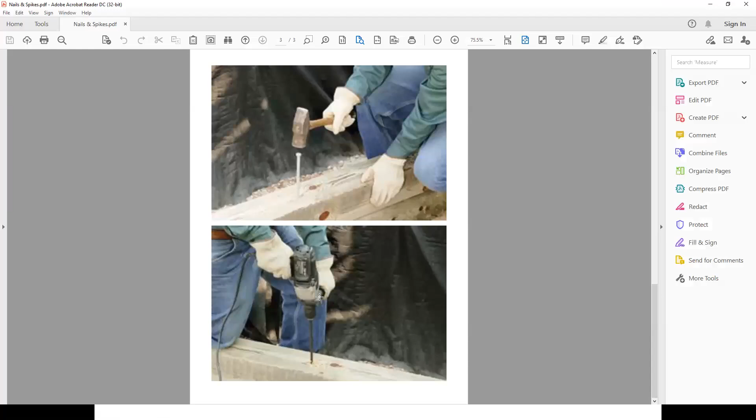So guys, these are of course nails. These are what we call common nails. There's a head and there's a point. And nails come in different lengths, starting at 1.5 inches, 2 inches, 2.5 inches. And they also have these, I never learned this, by the way, guys. I never specify, for example, a 3-inch nail with size D.

So I always specify the length of the nail. So if I want the guy to put 3.5-inch nails, I put a 3.5-inch common nail. And I want to specify common nail because today with the pneumatic hammers, they're also 3.5 inches, but the diameter is slightly smaller, and therefore it won't have the same resistance. And when they do that, what I tell them to do is increase the number of nails in proportion to the reduction in diameter. So keep that in mind.

So these are, like I said, nails that are fabricated from a piece of wire. So keep in mind, like I said, you can go up to 6 inches. Like when you're framing today, a lot of people are using screws as opposed to using nails, but nails are still being used. And of course, a lot of them are being used with pneumatic hammers.

So usually when you're framing, like in the old days, when you would be framing a house or a building, the most common nail you would use is 3.5 inch in length to fasten the lumber together, and then to fasten the sheathing, in other words your plywood, whether it's the flooring, the wall sheathing, or the sheathing on the roof, the most common nail they would use there was 2.5 inch. So the carpenter would most likely have 2.5 inch and 3.5 inch. That was the most common nail that they had.

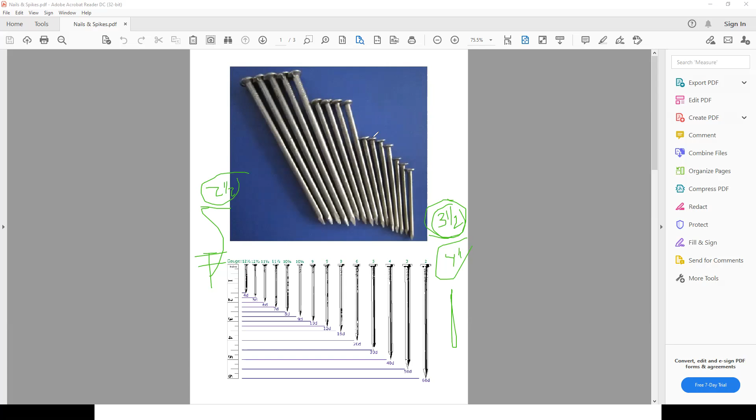And as a matter of fact, I know one carpenter, he likes to screw everything. He's got this cordless screw gun and he screws everything. And he's probably just as fast as the guy that's nailing with a pneumatic hammer, understand? And that's how he fastens things. I like his way of doing it because it's a much better fastener.

So just to let you know, these are the common nails, and that's what I want you to understand. Common nails. When you're referring to common nails, it's a regular head and so on. Now these are spiral nails. In other words, they basically are very similar to a common nail, but they are twisted. And of course, where are these nails made from?

Well, they're made from pieces of wire rod. This rod goes through a machine and the machine literally stamps these things out. I don't know how many thousands per minute the machine does, but they're all made from wire rod. The machine takes a piece of rod and bangs it out so that it creates the head and the point all at the same time, and then it spews it out and they package it and sell it. So the spiral nails are also used, and you'll see the advantage of the spiral nail over the common nail.

So now these are spikes. Spikes basically look like nails, but they are much, much bigger. And on top of that, they're not made from wire rod. These things are actually cast. They have to cast these things in a form.

And of course, these things are so big that you should pre-drill your timber or your lumber before you drive it into the wood, because if you don't, you have a good chance that you're going to split your wood. So therefore, whenever you're using these thicker fastening elements to hold big pieces of timber together, it's always recommended that you pre-drill a hole.

So now common nails and spiral nails are used for general construction, which makes sense. Spiral nails have greater withdrawal resistance than common nails and reduce splitting. Does everybody understand the word withdrawal? In other words, if the nail wants to get pulled back out of the piece it is being fastened to, the spiral nail has a greater withdrawal resistance, okay?

And at the same time, it reduces splitting. So that's the other advantage of using spiral nails. Some carpenters do use spiral nails. Some people just use common nails. Spikes are longer and thicker than nails and are generally used to fasten very heavy pieces of timber, as you saw before. If you're building a retaining wall out of timber and you want to fasten the timber together, one of the things you might consider using are spikes, and I'll show you other options later on to fasten timber in that fashion.

Now, nails are available in lengths from 1/2 inch all the way to 6 inches. So that's the common nails. And of course, spikes go from 4 inches all the way to 14 inches. That's pretty long. And if you ever need a 14-inch spike for whatever reason, you know that it's available. I don't know how available it is, but at least they do make some.

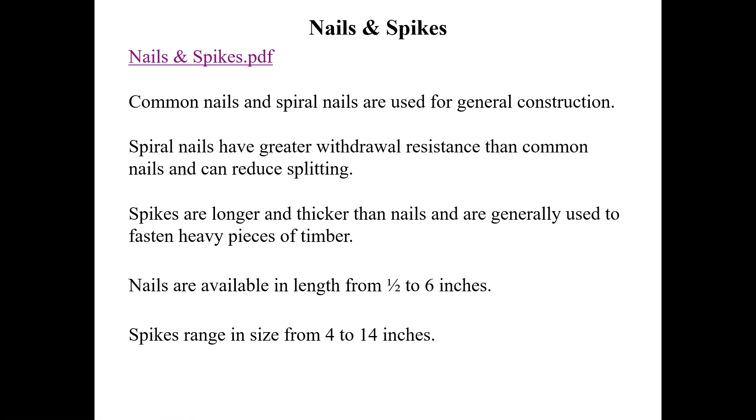Now, that was just to give you an overview on spikes and nails. Whenever you are designing anything, you want the factored lateral resistance to be greater than the factored lateral force. What that means is very simple. If this is my piece of wood here, and here's my other piece of wood, and this piece is being pulled here and this one pulled there, I put in a nail, in blue, I like blue steel, to fasten these two together.

So as this thing pulls, as you've seen in steel, it's going to be pushing on the nail, and the wood here has to be able to resist that pushing all along there. And when it's being pulled there, the same thing. So whatever resistance the wood has here and here, the sum of all of that, if you need 18 nails, the sum of all those 18 nails should be greater than the force you're trying to resist. That's what you're actually trying to do.

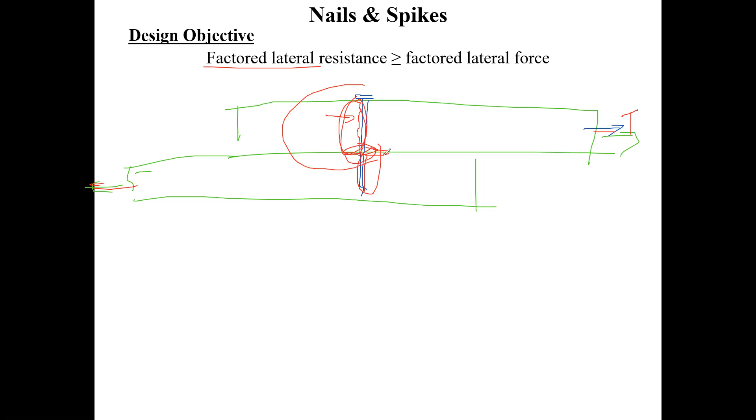It's very similar to bolts, except now you are relying on the wood to determine how strong it's going to be in bearing as the wood pushes against the nail. When is that wood going to start crumbling and failing because you've exceeded the resistance? In steel, you also worry about the shearing of the bolt because steel is very strong, but normally you don't worry about the shearing of the nail, because the wood is much weaker than the shearing of the nail. So you don't even consider that.

Oh, I'm sorry. Sir, are screws, how do you call that? Oh my god, I'm so sorry, I forgot the word. Hold on. Go ahead. Oh yeah, do screws have less shear resistance than nails?

Let me finish the lecture, Rena. Okay, I will talk about screws very quickly. In the handbook, I have, for example, the resistance of screws if you plan to use screws, okay? But on top of that, I'm going to talk about lag screws, which is another type of screw that is more common to use. So let's finish the lecture, and then I'll let you know which one. In other words, it depends.

Are we talking about withdrawal? In other words, the nail being pulled out of the joint, or are we talking about the nail getting pushed against? Okay. So what you have to remember, Rena, is that if it's withdrawal, of course, the screw will have a better withdrawal resistance than a nail because it actually spirals into the wood. But in terms of the lateral resistance, it all depends on the diameter of the screw and the diameter of the nail, because it's the surface area that comes in contact with the wood that's going to determine the resistance.

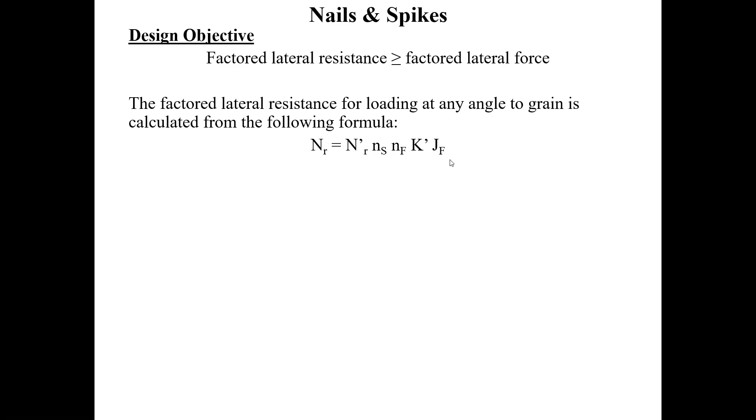Okay, so now the factored lateral resistance for a load at any angle to the grain is calculated by the following formula. So NR is equal to NR prime, NS is the number of shear planes, NF is the number of nails, K is the K factors when it comes to the environment that the nail is in, and we'll talk about all of these, okay? So now, NR prime NS, basic factored lateral resistance, is given in the nail selection tables. I know this is going to be a little bit overwhelming, but don't worry. I'm going to be providing this to you, okay?

So let me go back to the very first page. This is where you get the value of NR prime NS. The values are right here, depending on the species that you are fastening. If you're fastening SPF, you would come here. If you're fastening northern lumber, you would come here. If you're fastening Douglas fir and SPF, you always take the weaker of the two, okay? Now, the way the table is made is very confusing sometimes, but all of these are values based on a minimum penetration.

So in other words, this is the minimum penetration that the nail has to go into your joint. If you don't have 16, you can't use the table. You can't prorate to less than 16. You have to have at least 16 millimeters penetration in a Douglas fir. Now, what the side plates are, let me explain this also. If I take a piece of lumber like this in plan view, and another piece of lumber like this in plan view, and I plan to fasten these two together with nails like this, okay?

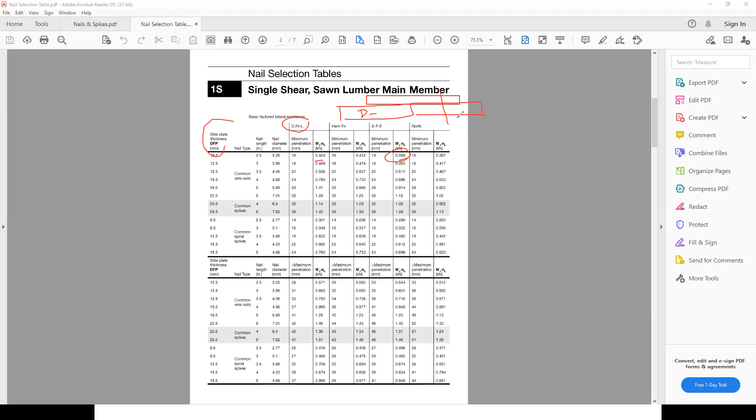So that's if your side plates are made out of Douglas fir. And again, minimum penetration, maximum penetration. And this is penetration in the member that you're connecting, okay? So keep that in mind. After that, you have also side plates made out of plywood. This is Canadian softwood plywood. And this is most of the plywoods that you're going to see in the lumber yards in Quebec.

In other words, this is made with either spruce, fir, or pine. They're all Canadian softwood plywoods. They're all basically the same, okay? SPF has about the same value, and when they make the plywood with it, it has about the same resistance, so they put that all into one category of plywood. So if you'd be designing your gusset plates for your truss at home, and we're gonna use the same one for our project, this is where you would come and get the values of N prime R and S. NS is a number of shear planes, and we'll talk about that.

And of course, again, this is to assure that you have a minimum penetration and this is the maximum penetration. I hate how they revamped nails in the handbook, okay? As a matter of fact, guys, it's scary because with the new way of calculating nails, half the projects I've done in the past, the nailing would be insufficient. Just to let you know how things can change. And if something happens to whatever I've done in the past, I can't go back to, well, that's what was done at the time and that's how I calculated.

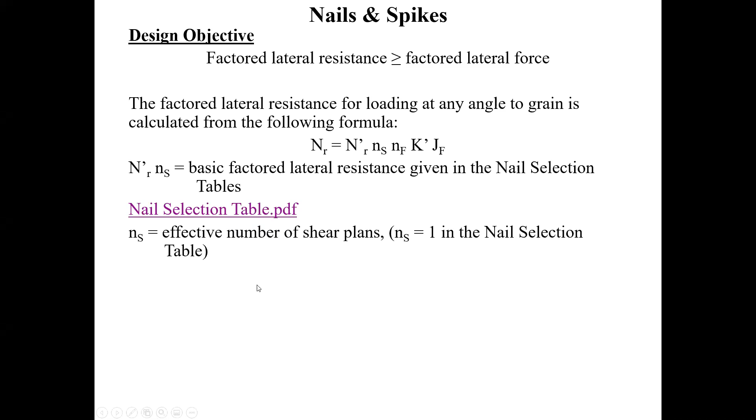Okay, so next, NS is the effective number of shear planes. Just like in steel, how many planes go across your nail? If it goes across only one place, then you have 1 shear plane. If you go across 2 places, you have 2 shear planes. Now, in the old days, this was much simpler. Now they made it really complicated. This is one of the things that threw everything out of whack: the nail penetration for shear plane.

So now if you want to have a shear plane, it is based on the penetration of the nail. And if you don't have that penetration, even though it looks like you have 2 shear planes, you shouldn't be considering 2 shear planes. Now, the minimum required penetration for single shear plane. If you want to consider that you have 1 single shear plane, this is what you have to do for side members with the nail head. So remember, it's got 2 different values.

So for example, here's one member, and here's another member. Remember, there's 2 different criteria. Oh, sorry. Okay, so here's my nail. Now, keep in mind that this is the side of the nail head. So if the nail head is here, the amount of penetration you need to have here has to be 3 times the nail diameter. If you want to know the nail diameter, that's in the table that I just showed you. And 0.9 millimeters for steel members.

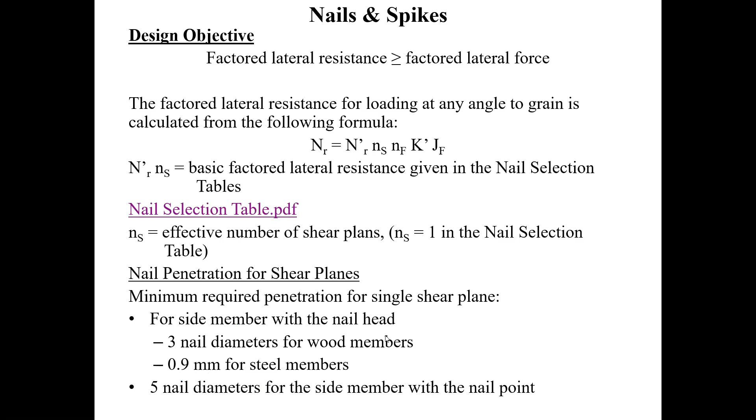Now, the nail penetration for shear planes. Minimum required penetration for double shear plane: 3 nail diameters for the member with the nail head, 8 nail diameters for the center member, and 5 nail diameters for the member with the point. So this means that if I happen to have, let me just change, what color should I make the wood? Brown. Brown is a good color for wood.

Okay, so here, if this happens to be one piece of lumber, this happens to be another piece of lumber, and then I decide I want to use, these are my side plates here. This is my side plate here, this is my side plate there. So if I'm driving nails, for example, this is in the old days. This is what we used to do, just to show you. Very simple.

We used to say, we know that this was 1.5 inches. We would have 1/2 inch plywood, 1/2 inch plywood. And therefore, if I would take a 2.5 inch nail, in the old days, I would consider to have 2 shear planes. That's the old days. Now, what happens is that if this plywood does not have 5 times the diameter for the thickness, I cannot consider that to be a shear plane. And that's what the problem is.

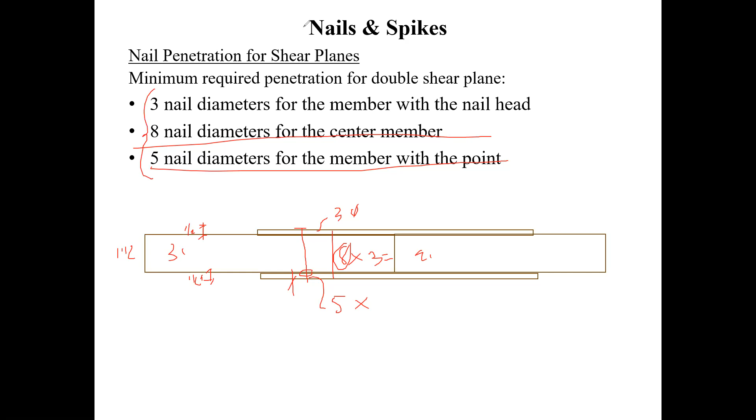So in other words, here this has to penetrate at least 3 diameters of the nail. Here it has to penetrate at least 8 diameters of the nail. Well, here's not a problem because even if I have a 3 millimeter nail, 8 times is 24 millimeters, and this is going to be 38 millimeters. So this has to be at least 8 times the nail diameter at the center and 5 times the nail diameter at the point. So keep that in mind. Before you jump to 2 shear planes, make sure that you meet these criteria. Clear the drawing.

Okay, so now, NF, of course, is the number of nails or spikes. I'm continuing with the equation. K prime JF. K prime is simply all the K factors lumped into one value, where K prime is KD, KSF, where F is for fastening, for serviceability, wet or dry, and KT, is the wood treated or not. So they've taken all 3 of these: depending on your KD value, your serviceability environment, and if it's treated, you multiply all three together and come up with one value to stick into your equation.

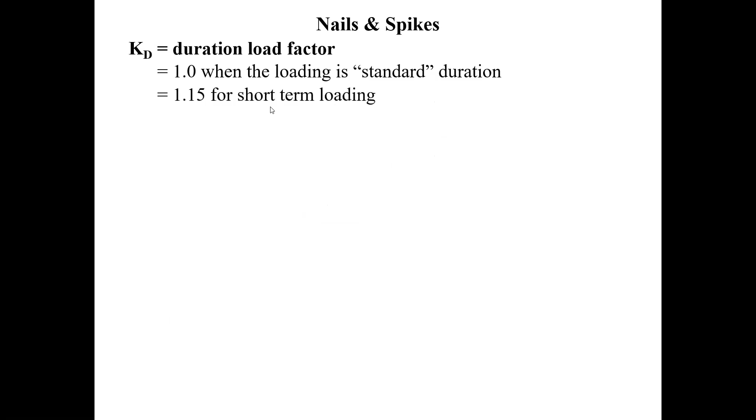Now, KD you're very familiar with, hopefully. If it's a standard load duration, KD always stays 1. If it's short term, for example, if you're designing for wind, diaphragms, or formwork, then you can take KD equal to 1.15. And if it's a permanent load, very long-term, you take KD equal to 0.65. So the KD values have never changed. It all depends on the duration of the load.

Now, KS for serviceability. If it's dry, of course, it's always 1.0. Now, keep in mind here, 1.0 for dry service conditions, and the lumber is seasoned. Seasoned wood, does anybody know what seasoned wood is?

Nope. Seasoned wood means you take a piece of wood and you put some salt and some pepper on it, and that's how you season it, right? The same way you season your steak. Does everybody agree? No. No. No. Okay. So seasoned wood means that, guys, I hope you appreciate, I don't know if you guys ever did

this, but has anybody ever cut a plant? Yeah, of course. Okay, you've cut a plant. And when you cut the plant, did you ever put your finger where you cut the plant? Yeah. Did you feel a lot of moisture? Yeah. Okay, because all plants have a lot of moisture. So when trees are cut, they all have that because they're all alive. So when they're cut, they have a lot of moisture in the wood.

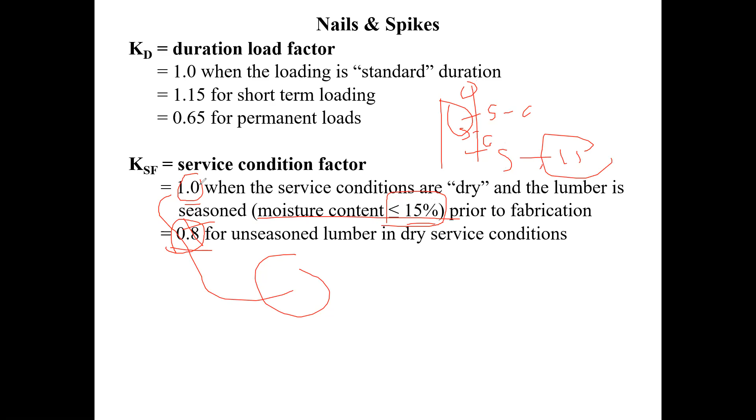And of course, 0.67 for wet service condition, regardless of seasoning or not. So if your wood is considered to be wet, and I'm going by memory, but I think when your moisture content is over 26%, they consider that to be wet wood. So less than 15, and I think it can go up to 26 for it to be unseasoned lumber. And if it goes over 26%, in other words, if your lumber's got 50% moisture, it's wet. So this is what you should be using for wet wood.

So you have 3 different values for KSF, and if you're going to be using dry lumber, which is what you're going to be buying anyways, and it's going to stay dry in its environment, then don't worry about that. Your KSF is going to be 1.0. And the treatment, the fire retardant treatment factor: 1 when the wood is not treated, with a fire retardant, or other strength reducing chemicals.

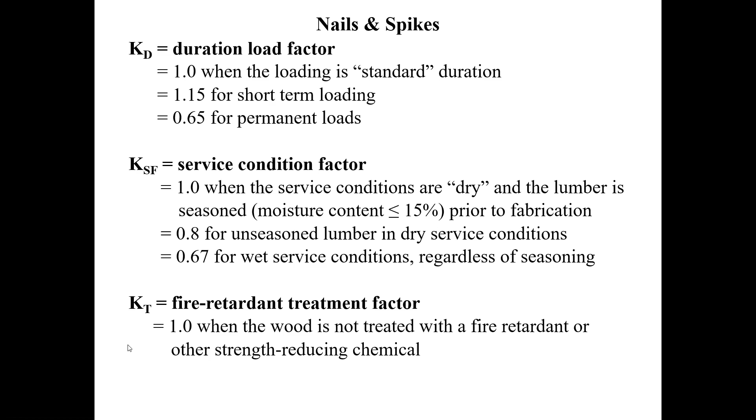And like I said, when it comes to KT, guys, if the architect wants to treat the wood because he needs a special fire resistance, you ask who is the producer of the fire retardant that you're planning to use on the wood, and you call up the manufacturer and they will give you the KT value. They have to, because they would have to establish it by tests. Don't guess it. Don't go take something out of a book. Call the manufacturer, ask them for the KT value.

Now, J. There's a lot of things that can affect J, so we'll take them one by one. So J, factor for nailing into end grain. Now, you should realize that, I'll draw it this way. Let me draw it this way.

Okay, this is my piece of lumber here, like this, okay? Now, here is the grain of the wood. Everybody understands that? Is that clear to everybody, or is my drawing pretty ugly? It's good. It's good, okay. And of course, if you look here, you start seeing all the rings that the wood has, right? And of course, that corresponds, okay.

Now, you can appreciate that if I drive a nail here into the end grain, it's much weaker than if I knock it here into the side grain. Okay, so depending in which direction the grain is acting on the nail, you have to take that into account. Okay, so this is for nailing into the end grain. I'm not going to clear that because I'm going to use it.

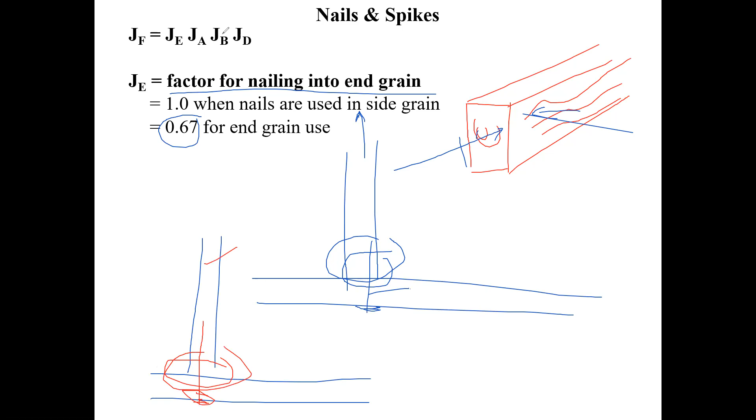For example, if I happen to have a header joist here and then I have joists coming here, well, when I'm nailing through the header joist into the joist itself, this is a side grain here, and of course I'm nailing into the end grain of this joist. So it's always going to be based on the weaker of the two. So that's something else you have to take into consideration. Am I nailing in the end or am I nailing into the side? And look, you lose 1/3 of the resistance when you're nailing into the end, so it's significant.

Okay, now JA is for toe nailing. Now who doesn't know what toe nailing is? I don't, sir. You don't? Okay. So I'm going to show you what toe nailing is. This is toe nailing. In other words, you're not nailing on the side. You're not nailing at the end grain. You're actually driving the nail at a diagonal. Okay. So these are toe nails.

And of course, if you look here, if you want to hold this lumber here to this one, there's no way that you're going to be able to drive a nail through this, and therefore you have no choice but to toe nail here. Like if you're putting this blocking to build up your structure, this piece of wood here, you can nail this way and hold it in place. But then when you put this piece, how are you going to be able to nail it this way? Well, you got no choice but to toe nail.

And of course, if you're building your partition and your plate is already on the floor, and you need to nail your studs to your bottom plate. In other words, if you don't have the luxury of having everything laying flat on the floor so you can nail underneath to hold everything together, you got no choice but to toe nail to hold the stud to your bottom plate. And that's what they're showing you here.

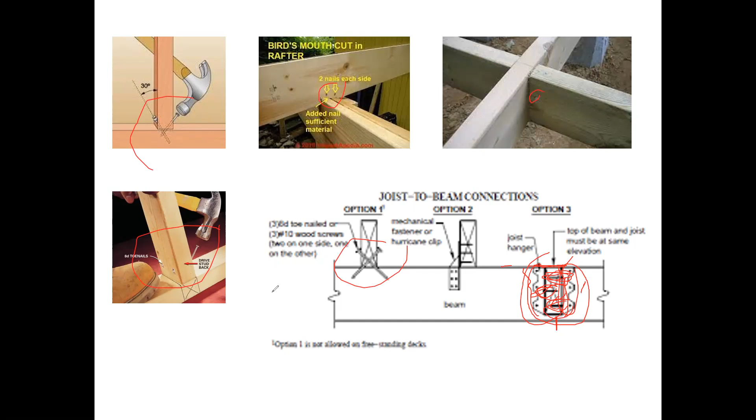And of course they put 2 on one side and then the other one goes right in between the 2 on the other side. That's what they're trying to show you here. 2 there and 1 on that side. You don't put 2 on the same side and 2 on the other side. It's 2 on one side, 1 on the other side for a 2x4. If it happens to be a 2x6, well, you can go a little bit wider. Okay, so that's toe nailing, and I hope that gives you a good idea of what we're talking about.

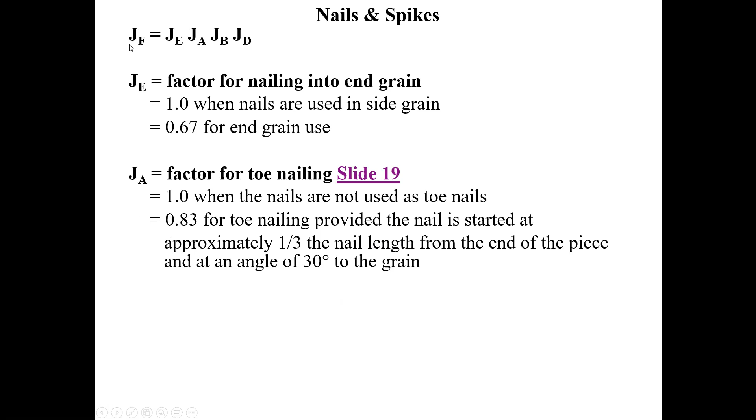Okay, now 1.0 when the nails are not used as toenails. In other words, no reduction factor. But if you are, you have to multiply the resistance that you have by 0.83 for the toenail, provided that the nail is started at approximately 1/3 of the nail length from the end of the piece. So this means that,

here's my piece of lumber. And this is what I want to toenail here. So I have to start at approximately 1/3 the length of the nail from the end piece. In other words, if I have a 3-inch nail, I have to start at approximately 1 inch here, and at an angle of 30 degrees to the grain.

And seasoned carpenters, they know this. First of all, they learned this in their trade school. And trust me, these guys are good. It's gonna be 30 degrees. They have their nail in their finger and they know exactly how to drive it in and how far and so on. Because if you put it too close, it's gonna split the wood, and if you put it too far, you won't have enough penetration. So keep that in mind. So that's what you need to do.

So when you see the guy toenailing, if you see that he's using a 2-inch nail, he should be a little bit less than 3/4 of an inch away from the end of the member. In other words, it has to be at least 1/3 the nail length away from the end of the member where he's driving the nail. That's it. So that's for toenailing. Now, nail clinching. Who can tell me what it means when we're clinching a nail?

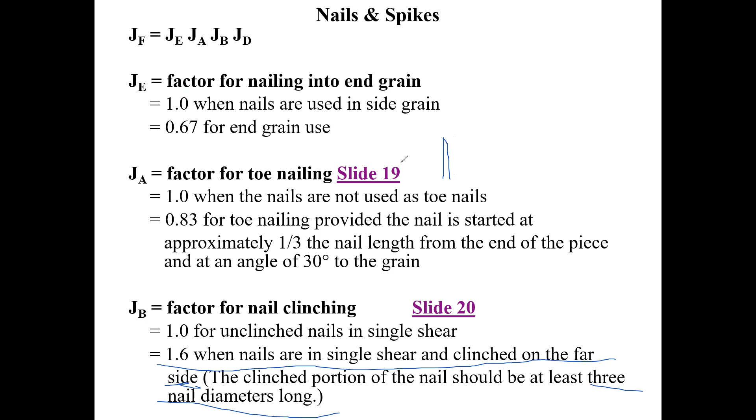But keep in mind the clinching factor, 1.6, is for nails that are single shear and clinched at the far side. The clinched portion of the nail should be at least 3 nail diameters long. So if my nail is sticking out of my wood here, and here's my wood, and this happens to be less than 3 diameters, you can't even consider that to be clinched.

For example, sometimes you see these guys, the nail just pops out of the wood like this, and then they bend it over. That's not a clinched nail. To take this into consideration for your resistance, the nail has to exceed by at least 3 diameters in order to be considered clinched. And if it's not 3 diameters, you won't even be able to bend it and clinch it properly, first of all. So keep that in mind.

So this can be very beneficial when you're in single shear and you want to reduce the number of nails, because look, if you tell the guy to clinch the nails, wow, you're increasing your whole resistance of your nailing by 60% right there, okay? That could really help you to minimize certain things.

And then the last one, the JD, well, we're not going to get into that, but the JD is for diaphragm construction. In other words, diaphragms are used to resist lateral loads, like for wind and for earthquakes. And because it's such a temporary load, okay, 1.0 for nails not used for shear walls and diaphragms, okay?

And if you're using nails as part of your diaphragm, you're allowed to increase, just because wind and earthquakes is a very temporary load. This is like taking advantage of the fact that you could increase the temporary resistance of that nail. But we're not even going to consider this. We're just going to take JD to be 1.0. So that's the 4 J's.

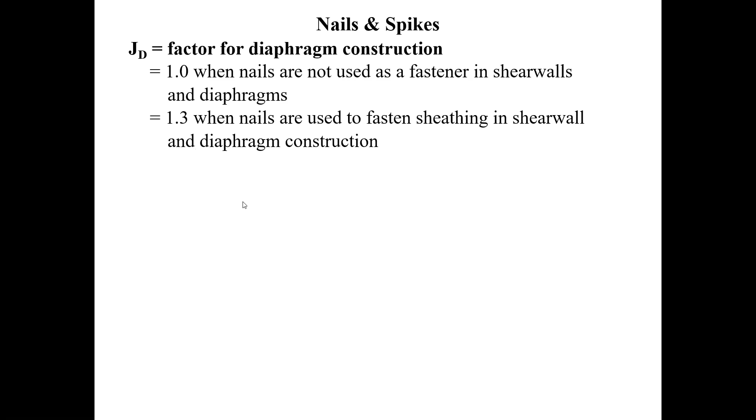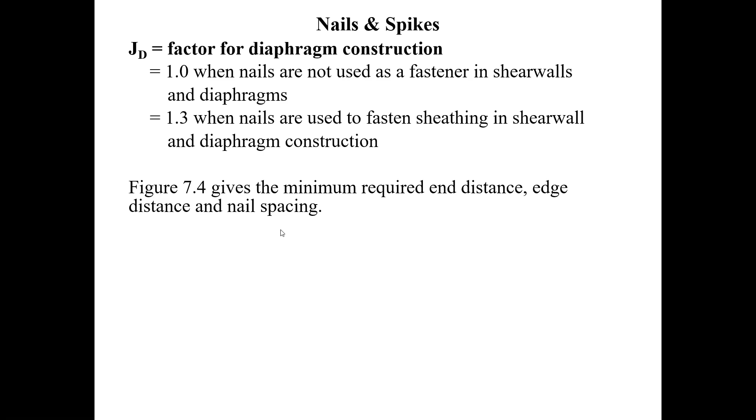And now here is figure 7.4, which gives the minimum required end distance, edge distance, and nail spacing, okay? And I want you guys to look at this, and I'm going to try to show you the difference. Okay, first let's start with something simple.

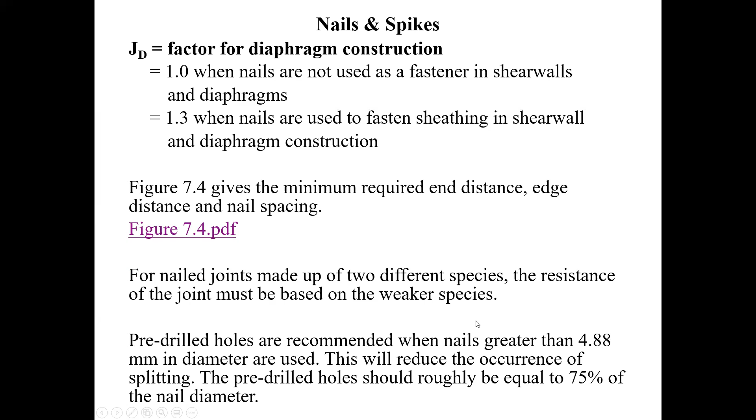Of course, wood screws. I didn't bring any examples of wood screws; I guess you guys have all seen them. And that's another fastener that is very commonly used to fasten wood together.

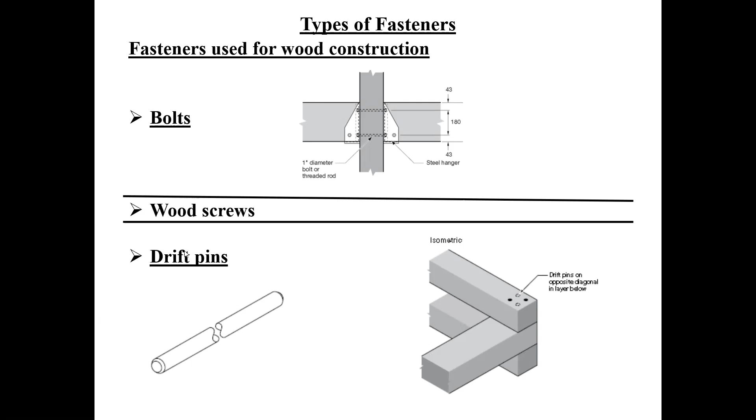So these two will help to assemble these two together, then they put another piece. So these are called drift pins. If you ever hear the word drift pins, this is what you're looking at. Now, this is a very common fastener that you use when you want to get a lot of resistance from a screw. So instead of using wood screws, this is a very common fastener.

So for example, whenever you have these big side plates that are made out of steel plates, and you're using that to make your joint, and you want to be able to fasten the steel plates to the lumber or to the timber, one of the most common things that you use are lag screws. So it looks like a screw, but they're very, very good. If you hear the term lag screw, like I said, in the handbook you've got all the values that you need to be able to determine how many of these you need to do your joint.

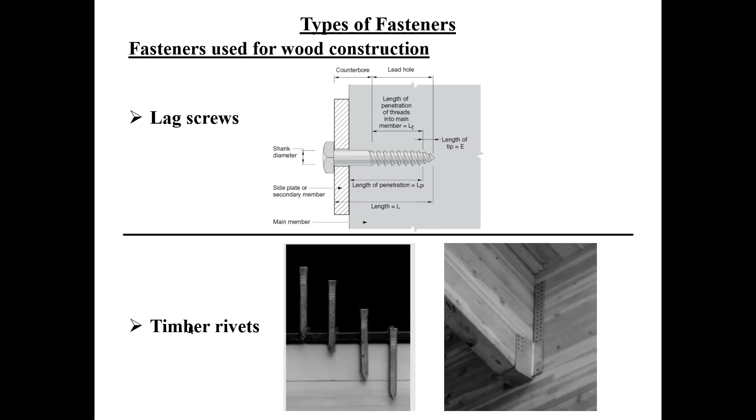You see? Because I think I'm thinking the same thing that Omar is thinking of, where it's like a plate, but it's already welded onto it, pre-welded. And then you just hammer the plate onto the wood. Oh, those are truss plates. Oh, okay, that's what it's called. They're truss plates. Okay, so truss plates. That's what you're talking about. I guess so. Yeah, maybe.

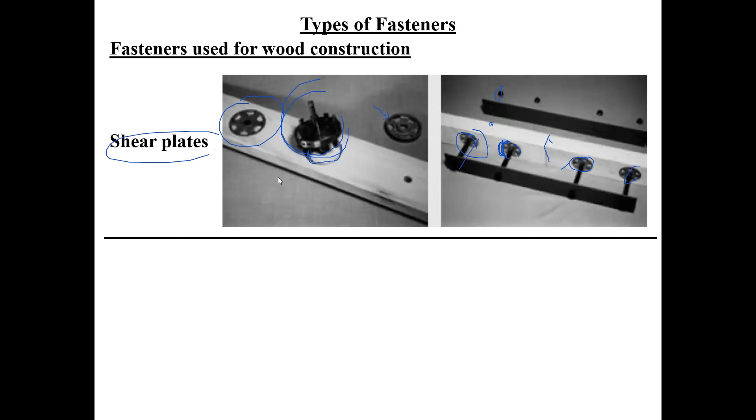So this is what bears on the wood, and of course you put the steel plates across them, and you put your bolts. These are bolts, and you just bolt them together. So this is a nice detail. So you can either go with shear plates, or another fastener called split rings. This is a little cheaper, you understand? A little cheaper, but same thing.

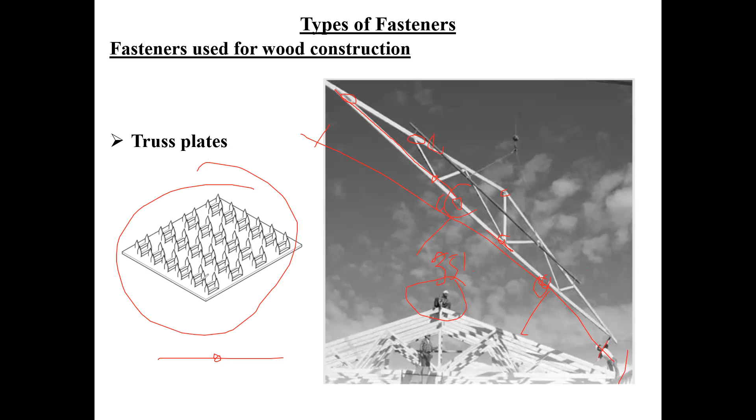And then after that, of course, they have to brace all this together and so on. So these are what you're talking about. So these are sheet metal, right? In other words, just galvanized pieces of steel, 14 gauge, 16 gauge, 18 gauge, I don't know. I really don't know what the thickness of the sheet metal is. And of course, they get stamped right into the wood, okay? Bang. And of course, you're relying on all these penetrations into the wood to give you the resistance, okay? That's what's happening.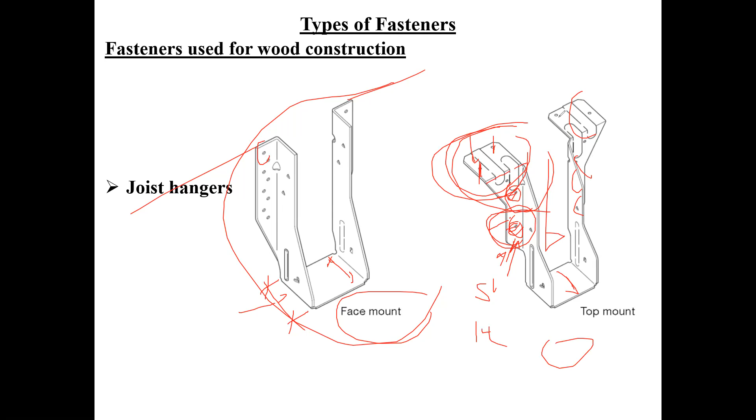And that's why here you have much more, because here the nail is acting this way, and of course you got all of this to help, okay? So therefore the nail is acting totally different here to resist the shear force as opposed to these ones here. So you can appreciate that it takes more nails when it's side mounted versus when it's top mounted. So that's the difference.

Oh yeah, one more thing I want to show you. So, for example, here, if you don't want to use joist hangers, you can use these brackets, okay. These are brackets. And of course, this here is very important when you have a lot of uplift, okay? In other words, if your toenailing is not sufficient to hold the rafters of your roof up, you might consider using these brackets to tie down.

And then of course, you should even tie down the studs that are going to be subjected to the uplift, okay? So this all has to be calculated to make sure that when the wind blows over your structure, your roof doesn't blow off. And then on top of that, it doesn't blow off the wall. Now keep in mind.

If you're going to be putting a sheet of plywood here, and if you're going to calculate the number of nails, the sheet of plywood is going to be nailed to the bottom plate, and it's going to be nailed here. So this might replace that, okay? But if you don't have anything like that to transfer this to there, you might consider using that bracket, okay?

And of course, there's different types of brackets, okay? And at the roof, this is very, very common to tie down the roof properly. These brackets are very, very common, and that's what they're showing you here, okay? And of course, instead of using joist hangers, you can use brackets if you want, right? So this is another type of fastener that you can use.

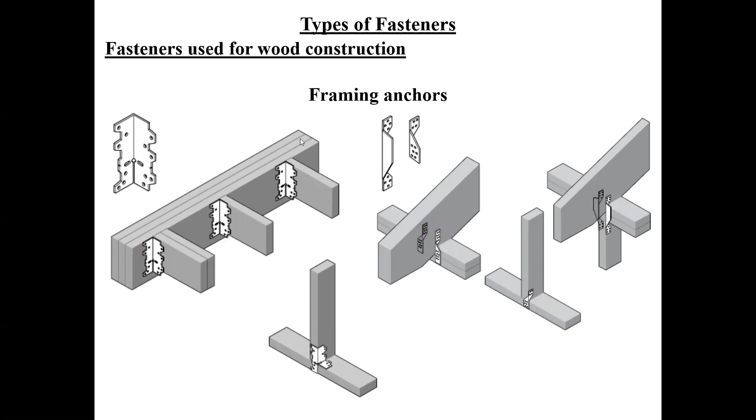And of course they have tables. They'll give you all the information on how to calculate what you need. All you need to determine is what force you want to resist, and then you just go into the tables and see what you need. So very convenient for that. As a matter of fact, they came up with a new fastener recently, which I thought was really neat, and it doesn't come to me right now, but if you guys are interested, Strong Tie is the name of the company. They have really nice catalogs when it comes to fasteners, and you'll see so many of them in there.

Now, let's take everything that we learned and apply it to make a joint, so we can start being practical. So here is a typical situation: determine the size and number of nails required for the plywood tension splice shown below. Of course, it's in tension because this member is being pulled, and the lumber members are kiln dried, 38 by 140. In other words, this is a 2x6 SPF, and the plywood is 12.5 millimeter sheathing Douglas fir. I threw in Douglas fir because on the project we're going to be using Canadian softwood plywood, so I want you to be able to use both tables.

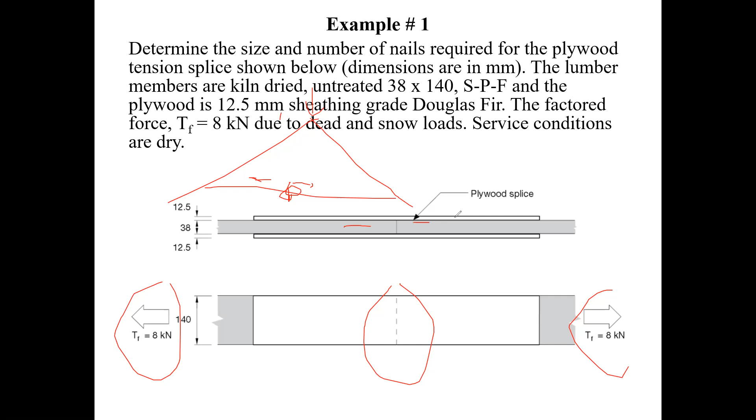Now, the factored force here, TF, is 8 kilonewtons, due to dead and snow loads. So what the guy did was very simple. He had his truss, and he's got a joint here in his bottom chord. From his analysis, he found out that bottom chord had a force of 8 kilonewtons. And now he has to splice the two pieces together so that the joint can transfer the load properly from one side to the other. That's what that is.

So first thing you're going to do is determine the modification factors. KD is 1, perfect. KS is 1, because we're using dry service conditions. In other words, we're going to use dry lumber in dry service conditions, with untreated wood. So 1, 1, 1, which means our K prime is 1. I'm doing this to remind you guys that you should always keep in mind how these factors can affect the resistance in your calculations.

And when it's not 1, they're always less than 1, except for short term, which is the only one that goes higher than 1. If you forget that one, it won't hurt you because you're just not taking benefit of that situation. But all the other ones are less than 1, and if you forget one, that can hurt you. So keep that in mind. Now, J is 1, because it's nailed in the side grain.

1, because we're not toe nailing. I hope you guys can see that. Do you want me to go back? Okay. In other words, the nail is being driven like this, and therefore we're going into the side grain. The grain of this material here, that's the grain of the lumber, because the lumber is always produced with the grain parallel to the length. And therefore, as far as this lumber goes, we are driving it into the side grain. We're not driving it into the end grain here, okay? So that's what we're doing there.

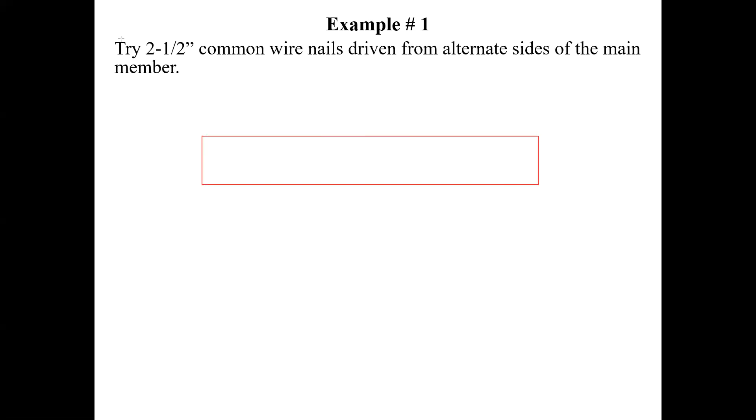Now, try 2.5 inch common nails driven from alternative sides of the main member. What I'm trying to say here is, here's my main member, there's my side plate, there's my side plate, and so on. And the joint would be somewhere in here, okay? Now, when we're driving our nails, we want to drive one nail with the head on this side, and then one nail with the head on this side, okay?

Now, keep in mind, the reason why I say 2.5 inch nails, because this is 1.5 inches. This is 1/2 inch. This is 1/2 inch. So therefore the nail should end up flush with the end here, okay? And that's why I'm saying use 2.5 inch nails, which is a common thing to do to be able to drive this into the other side.

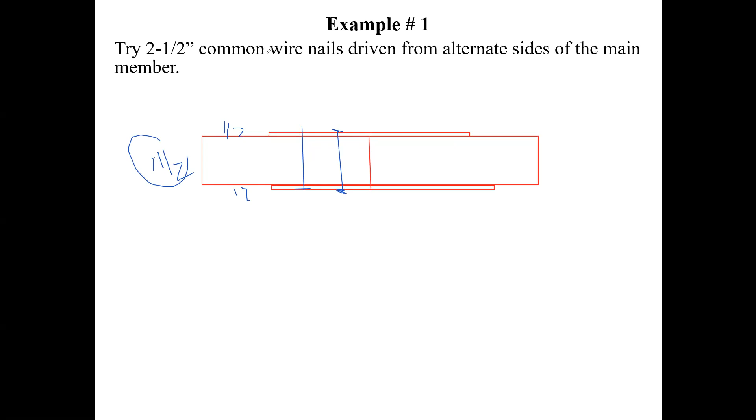So now we go to the nail selection table. We said we had SPF lumber and we had Douglas fir side plates. Did we say that the side plates were 1/2 inch? I don't even remember. Did we say that the side plates were Douglas fir and the lumber was SPF? So if we go to the table, we look at two values, okay? We don't have lumber side plates. We have Douglas fir side plates right here, okay? And we're using 1/2 inch thickness plywood, and we're using 2.5 inch nails.

Now here where you see the diameter, remember what they said, when you go over 4.88, they recommend that you pre-drill the hole. So for a 5 inch and a 6 inch nail, you should pre-drill a hole if you're going to be using that to fasten your lumber. So here, this is the side plate, but this is the lumber, and therefore the minimum penetration is 16 millimeters. And if I have 16 millimeter penetration, I have the NR prime NS value equal to 0.412 kilonewtons. That means for every nail that I place there, I will get that much factored resistance from that one nail. So that's for the minimum penetration.

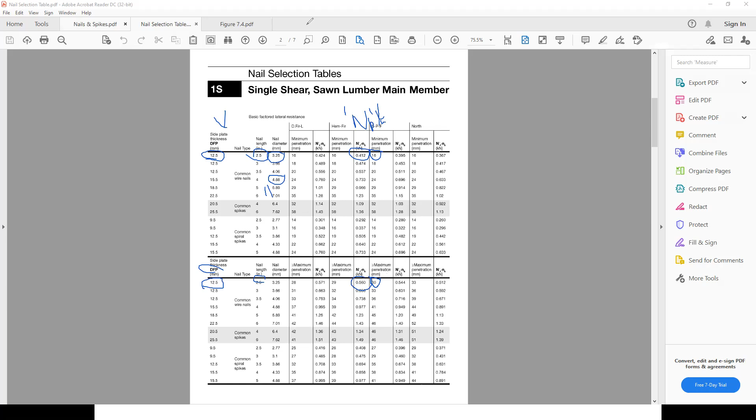And then here for the same thing, 1/2 inch thick Douglas fir plywood, 2.5 inch nail. And for SPF, the maximum penetration is 30 millimeters. So even if I go over 30 millimeters, the maximum value is 0.560. Okay, so that's the two values I get from this table. And maximum penetration has to be greater than 30. In other words, if I have 32, 35, 38 millimeters, I can rely on an NR prime NS value of 0.560 kilonewtons per nail. Now, I need to determine, do I have one shear plane or do I have two shear planes?

Now, basically the actual penetration is 38 millimeters. So what this means is that if I look at my lumber that I'm joining here, it's a 2x6, and therefore this lumber is going to be 38 millimeters thick, and when I have my side plate here and my side plate there, when I drive my nail through it, it's going to penetrate 38 millimeters, and therefore I have my minimum 30. So I can rely on this value to calculate the resistance there. Now the only thing I need to determine is, do I have one shear plane or do I have two shear planes?

Because if I have two shear planes, it's going to take half the number of nails. If I only have one shear plane, it's going to take me twice the amount of nails. So that's number one. So now, NS, the number of shear planes. We saw from the table that a 2.5 inch nail has a diameter of 3.25 millimeters. That you get straight from the table.

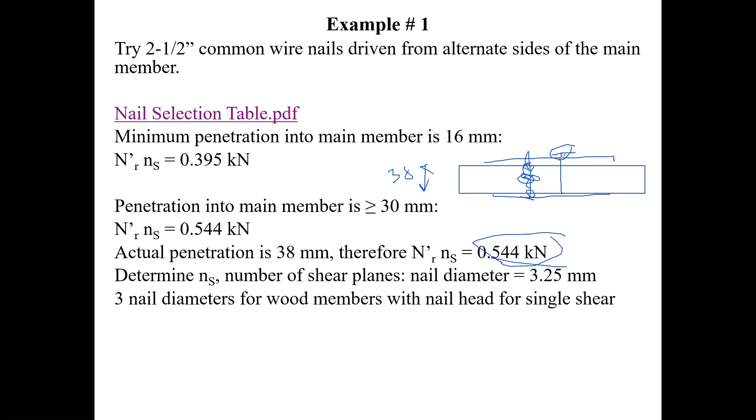Now, if you remember, 3 nail diameters for the wood member that is nail head for the shear plane. So here on this side, when I put the nail head on this side, the thickness of the wood has to be 3 times the diameter of the nail, so 3 times 3.25. So that's what it has to be on that side. And 5 nail diameters for the member with the point for double shear; in other words, the point will be coming out on this side. So I do the calculation, 3 times 3.25, 9.75. It's less than 12.5, my side plate here is 12.5. I'm okay. So I can consider that to be a shear plane right there.

That's okay. Now, when I look at the shear plane here, not a problem. I meet all the requirements for that one when the nail is driven on that side. Now, when I come to this side here, can I consider that to be a shear plane? Visually, you say yes, it has to be a shear plane because my nail is going to come right up to the point here.

But if you do this requirement, 5 times 3.25, you need a wood thickness of 16.25. You only have 12.5 for your side plates, so you don't have a shear plane. Even though visually it looks like you have a shear plane, because your side plate is not thick enough, you cannot consider to have 2 shear planes. And that's the mistake that a lot of people make.

Like I said, in our days, we would calculate this as 2 shear planes if you'd use a 2.5-inch nail based on what we used to have in the old days, and now that's no longer good. That means all my joints and my trusses have half the nails that are required. And I have to sleep with that at night, okay? So in this case, because I do not meet the requirement on the pointed side, I have NS equal to 1, not 2.

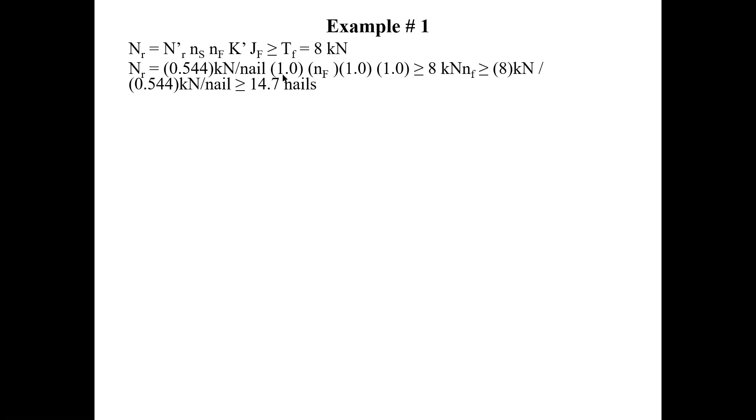Now, so here we go. I have all my values, and therefore I can just calculate the NF, the number of nails required. So I put the values. I've established that because I have 38 millimeters of penetration, and I need a minimum of 30, I can use this value here. And I have a value of 1 for the number of shear planes. I need 14.7 nails. So of course you will not put 14 nails. You would put at least 15 in order to satisfy your design requirements. Use 15 nails per side of joint.

So in other words, there's a joint. I need 15 nails on this side and 15 nails on this side. I don't need like 7 there, 7 there. That is wrong because that force has to get transferred to that number of nails through the lumber and to that number of nails back into the lumber. I've seen people say, oh, I need 15 nails, I'll put 7 here and 8 there. That's wrong. You need 15 on each member in order to transfer that force properly from one member to the other, and hopefully your ply won't split here.

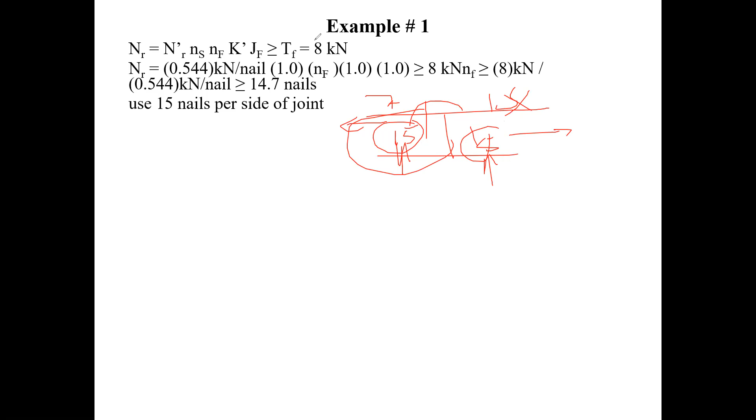Now, determine the minimum spacing, the end distance and edge distance. So we go back to this figure here. Now this is where people make a mistake. They say, oh, I've got Douglas fir side plates and therefore I can use the values here. No, your side plates have nothing to do with it, it's the lumber that you're fastening. You're actually fastening SPF, not the Douglas fir.

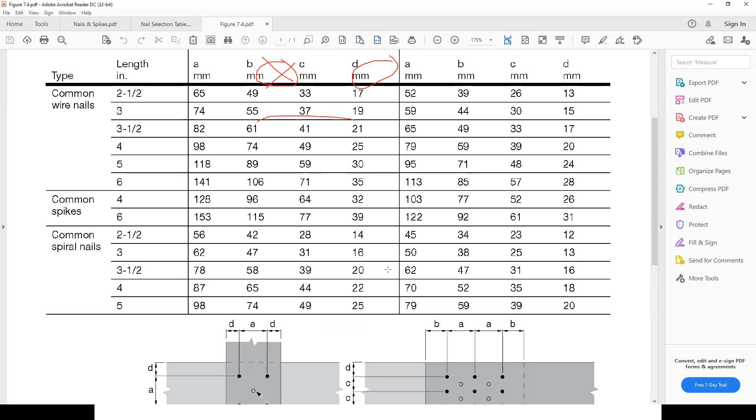Can you zoom in? Oh, zoom in on the table? Sure, hold on a second. Let me just... is that better? Yeah. It's just because I wanted you to be able to relate to these diagrams before, you understand? So here you go. Anyway, you're going to get a copy of this table when I finish the lecture. You're going to get everything, okay?

So in other words, SPF is what I'm using. This is the lumber that I'm fastening, and don't make the mistake of using Douglas fir, okay? So this is my A value, the distance parallel to the grain, B value, the end distance, C value, the distance perpendicular to the grain, D value, the edge distance. So that's where I get these numbers here. And I go back, so that's where I get my A, my B, my C, and my D.

Now, you'll notice that they said you need a minimum edge distance of 13. We provided 35. Isn't that nice? Here you need a minimum end distance of 40. They provided 60. This is straight out of the textbook, guys, okay? And then here, this looked like it's 30/30, but this is the A value there. This is 60. The A value is 52. They provide 60. So you see, everything is done in multiples of 5, multiples of 10.

And then here's the end distance for the lumber. This is the end distance for the side plate. And of course, whatever you do this way, on the drawing you would put a center line, and you would put S-Y-M-M, and what would that mean? That it would be symmetric, and the guy would do exactly the mirror image of that on that side of your joint. And that would determine the length of your gusset plate.

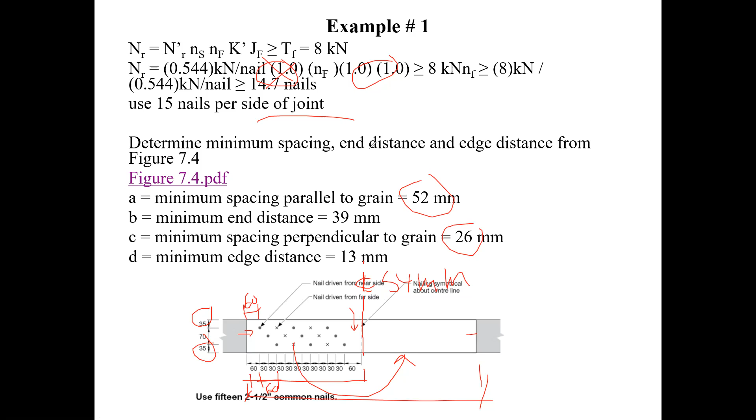So guys, do the assignment. I do strongly recommend you do the assignment. The assignment, I think, is going to be lumber to lumber. I want to change it up a bit. Do the assignment, because on the exam I'm not sure if I'm going to give you a problem similar to the assignment or a splice. So do the assignment and make sure you know how to do both. The assignment should be coming out around 5 o'clock today; have it done by next Thursday. So that's it for that.

Now, let me close this. Like I said, I'll be sending you this. Now, let's look at our project and our trusses, okay? We go till 5:30, so we got time, guys. So let's go here. We'll talk about the project now from the beginning: truss joints. And trust me, when I was your age, this is not the type of joints that I used to worry about. So, axial forces.

So this is what you got from ADA. It looks very ugly here, but basically it tells you all the axial forces in your members. Now keep in mind, this member here is continuous. So am I going to have to worry about doing any nailing in this member? No. It's going to be continuous because you can find lumber that's that length. And here, the members in compression are pushing together. So do I even worry about the nails there? No. What you need to worry about is the joint for the web members, the joint for the tension members.

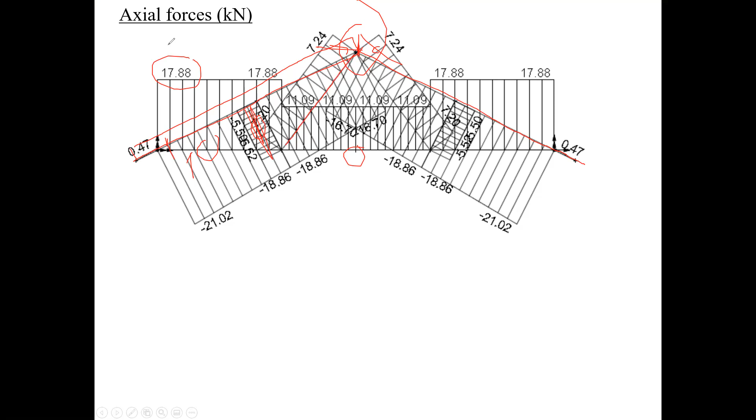In other words, you have to worry about this tension force here that you have to join this to there. You have to worry about the tension force of the splice. You have to worry about the force here in this member here in case you have a reverse, okay? And then you have to worry about the force in this member here. Now, let me just,

so here is, okay, now, the number of nails, so this is basically your joints. The number of nails that I calculate for joint number 2, I'll be putting on joint number 1. The number of nails I put here is what I'm going to be putting here. So here I have absolutely no joints. The number of nails I need to join this member to that member, I'll put the same number of nails here, the same number of nails there.

And then here, of course, for joint number 5, it's going to be the sum of the nails I need here and the nails I need here. So here I'm going to have the sum of these two joints. And therefore, okay. What we're going to do in the lab is we're going to do this joint here, and then I'll expect you to do all the other joints, okay? So these are the joints.

So in other words, you have to design this joint. You have to design the spacing for this joint here, because here your gusset plate is going to look like this. Okay, so here you're gonna have to make sure you have the right spacing here and so on. So the objective, what I'm gonna be looking for is the number of nails. Once we calculate the number of nails for this joint here, you're gonna use the same NR value for everything else. So that's gonna be a piece of cake.

Once I've established the NR value for one joint, it's the same NR value. So for example, here, if I have 7 kilonewtons, I divide that by that NR value, that gives me the number of nails. All I have left after that is determine the spacing. Sir, yes. It's not necessarily that it's a, what's it called? It's like an image. If you do the left side, it's the same as the right side, right? Oh yeah. Once I calculate this joint, that becomes the same thing. Exactly. In other words, you're not going to be doing this joint and that, because they're exactly the same forces.

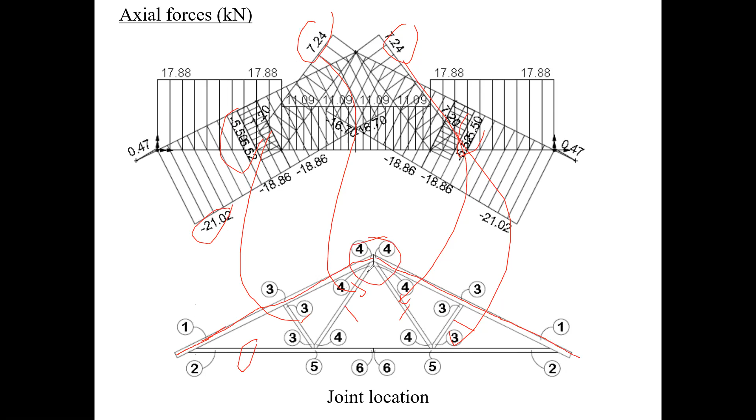What I do is I simply do myself a sketch like this, and then I click on the member and I write the force here. Understand? And I write the forces on my diagram. So this way I don't take the wrong one. See here, I don't worry about this 21 here because I don't have to join anything here. I don't worry about any of the force in this member here because this member doesn't have to be joined. It only has to be joined up here. It's only when I join this member to that member and that member to that member, that's all going to get joined together. Okay, so you're right, Omar.

This joint here will be exactly the same here. But on your drawing, you're going to point this as joint number 3, and then you're going to have a schedule. You're going to put joint number, right? And you're going to put the number of nails that you need to have for joint number 3. That's what you're going to show on the drawing. That's why you have to point them, so the carpenter knows how many nails to put there, how many nails to put there, and so on.

Sir, I have a question. What if my right side and my left side, some of them are not the same? Do you want me to recalculate them both, or do I just use the higher one? If they're not the same, then something's wrong. It's bizarre. When you're telling me that it's not the same, how much of a difference are we talking about?

Not much. Maybe 1 or 2 kilonewtons difference. Oh, kilonewtons. We're not talking about 0.1 kilonewtons, we're talking about 1 or 2 kilonewtons. Yeah, I think so. Okay, I suggest you look at your modeling and make sure you've released everything properly. That's what might be giving you the different values. Okay, thank you. And guys, I want you to do this once in your life so that you can appreciate that.

If you analyze a truss on ADA, everything is fixed, okay? You know that a steel truss has to be analyzed as a pin structure. So you pick all the members, go to MX, go down and put 0, 0. ADA is going to release all the connections and make them pin connections.

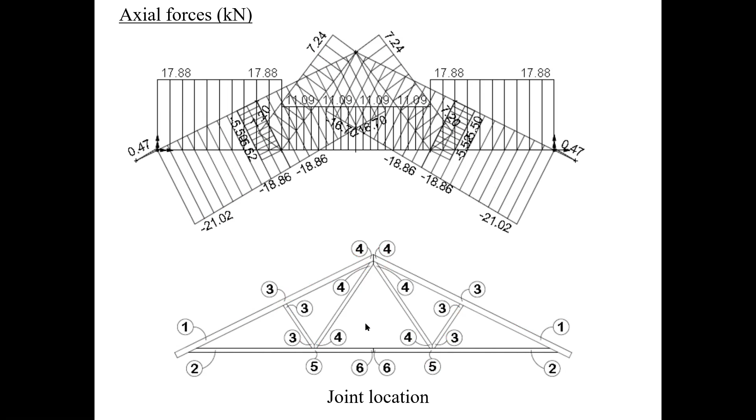Okay, so here we go. These are the joint numbers. If you want to copy these down or take a screenshot, here's the force in joint number 1, because it's the same force as joint number 2. This is the top chord here, this is the bottom chord here. So you have a tension force here of 17.88 kilonewtons, and this has to be able to resist it when you put your gusset plate here. So the number of nails you have here will be the same number of nails you have there. So that's joint number 1, joint number 2.

Then this is the force for joint number 3, this is joint number 4, here's joint number 5 and joint number 6. So you've got all the forces. This is the actual force that the member has, and that's what you design the joint for. And I think we're going to be doing joint number 6, in other words, the splice in the middle, just like we did in class. So this is what you have.

If I'm not mistaken, we decided that a 2x4 was good enough for the bottom chord. Am I correct? Yeah. Good, thank you. And we said the top chord is going to be a 2x6 and the web members are going to be 2x4. Keep that in mind. Now, this is the force the member has to resist. So I have to calculate the number of nails I need to put on this side, and repeat that same number on that side. Then I calculate this length, and that's going to be the length of the splice plate.

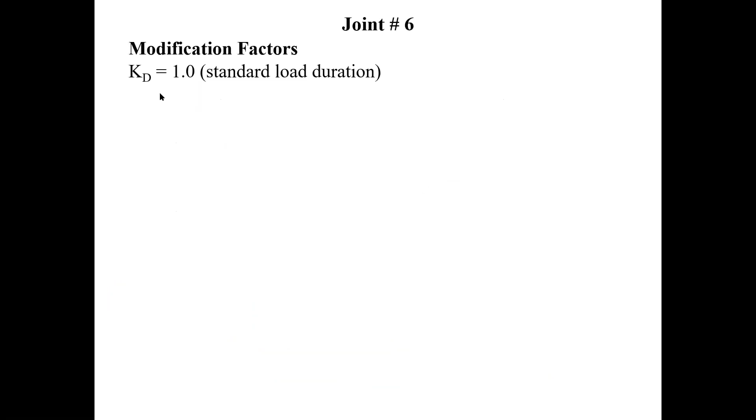Okay, we will have KD is 1, KS is 1, KT is 1. Perfect. And the same thing as the example. So therefore, K prime is 1, and the same thing. We're nailing into the side grain of the lumber that we're making the truss with. We're not toe nailing, we're not clinching, and we don't have any shear walls or diaphragm, and therefore our JF is 1. So therefore 1 and 1.

Okay. Now it's good practice to do this, because if you can take advantage of clinching, it helps. And some people overlook that. Okay. Now, using 2.5 common nails. Why? Because I'm using 1/2 inch plywood, 1.5 inch lumber, 1/2 inch plywood. I want to be able to drive the nails from one side to the other without any of them sticking out. That's number 1. Okay. And of course, we go here now.

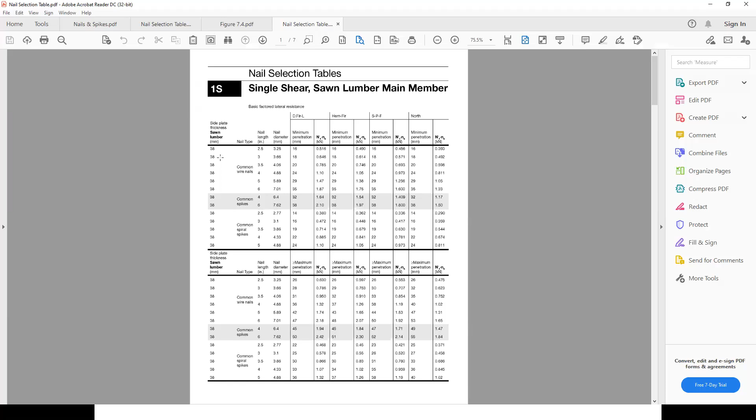Now the difference is that here we don't have lumber as side plates. We're not going to use Douglas fir plywood. We're going to be using Canadian softwood plywood. It's going to be 1/2 inch thick. We're using 2.5 inch nails. Therefore, we need to have a minimum penetration of 16 into our member. That's not a problem. And that would be the value of NR prime NS.

And then we need to have a maximum penetration. I'm sorry, I'm looking at the wrong one. This is the lumber. I apologize for that. Let me erase that. Okay, so here is the minimum penetration, and there's the diameter of our nails. Keep that in mind, and that's the length of our nails. And then for the same thickness of plywood, for the same length of nails, we need a maximum penetration of 29, which I know we won't have a problem with because we're penetrating at least 38 millimeters, and that's the value of NR prime NS. So that's what I get from the table.

This is to make sure I meet at least this, to have at least one shear plane. And then this is to make sure that I can see what value. And of course, if the penetration was somewhere between 16 and 29, I could interpolate the value if I wanted to, but I won't have to in this case. So let me just minimize that. So for 16, that's the value. This was 29. I don't know why I put 30. I probably copied. So this was supposed to be 29. This is the value.

Did I take the right value from the table? Do you guys know? I don't remember. No. So I took the wrong value. 0.516. Yeah, so I took the wrong value. So I have to change it. So it's 0.516 for 29 millimeters. And it's 0.38. I know what I probably did. I probably cut and pasted the example I did in class, and I didn't bother correcting it. So this is wrong. I want you to correct it.

So what's the value we had here? Okay. 0.38. Yeah, 0.38, and then here we had 0.516. So I apologize for that. As long as we have the value, because this value is going to be the same value we're going to be using for all the joints. So we better make sure these are correct. This is wrong. This is correct. Okay, so keep this in mind. So I probably used the wrong value in my calculations. It's going to have more nails. That's all. You understand? The actual penetration is 38 millimeters.

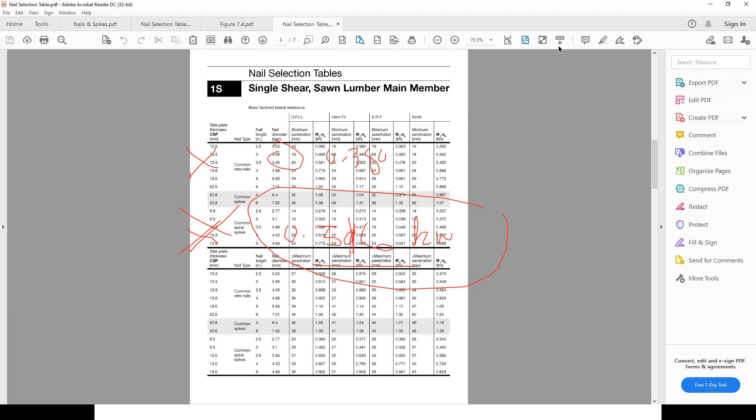You guys want me to correct this right now, or can we just correct it as we go along? So I'm going to just write it down here. 0.51. Pardon? Is it 516 or is it 502? Because I was looking at the table. Okay, let's go back and let's be careful about this. That's why, like, I was a little careless. Yes, sir. Yeah, let's go back and take a look. So here we are. First of all, we're right here. We agree. So that's number one. And we are right here.

Right? So it's 0.502. Okay, so 0.502 is the right answer. And for the second one, here we have a value of 0.363 and 0.502. Okay.

Sir, basically what we did in the class example is kind of wrong, because you took the left column instead of the right column. We were under SPF, and you went to the left instead of going to the right. So I took the wrong value in the class. Yeah, in the class example. It's possible. No, he used Douglas fir plywood. Yeah, but in class, I think I used...

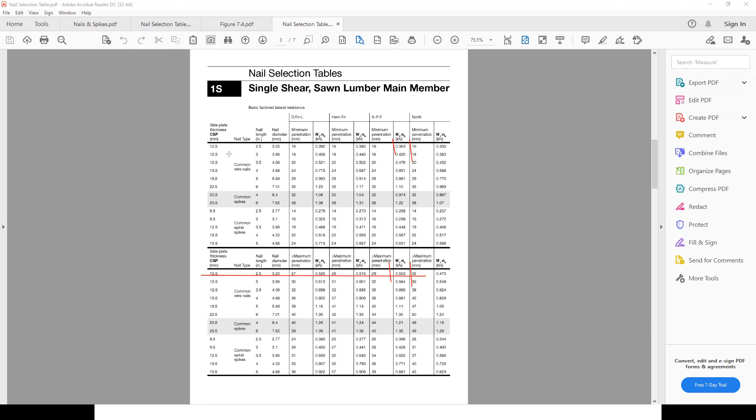Hold on a second. First of all, I used Douglas fir plywood. Did I use 2.5-inch nails? Well, guys, if I used the wrong number in class, did I use 0.51 for the example? I don't remember. Anyways, I'm going to correct it before I send you the lecture, just to make sure. How's that? Okay, perfect. I apologize that I took the wrong value. See, it happens to the best of us.

So this here, like I said, this is wrong. But now determine the number of shear planes. This doesn't change anything. The 3 nail diameters, this is exactly like the class. 5 nail diameters for double shear. If we do the calculations, this is okay, but this is not okay. So therefore our NS value is only 1, not 2.

What this means is that, unfortunately, when the nail penetrates here at the end, this has to be at least 16.3 millimeters thick, and we only have 12.5. Because it's not thick enough, we can't take advantage of that shear plane. We only have the shear plane here, because here we need 9.8 and we have 12.5. So we have a shear plane there.

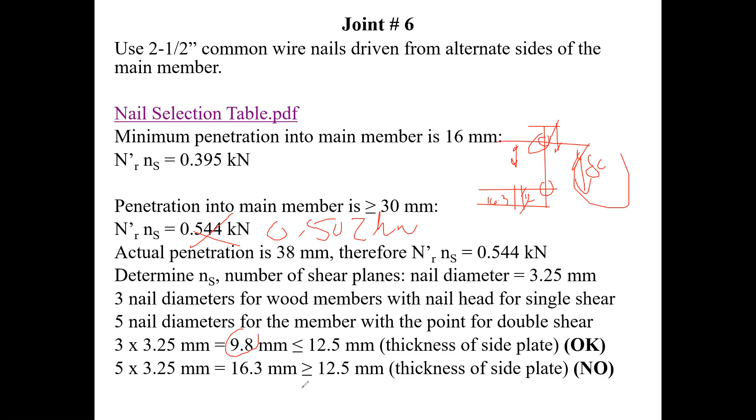We have a minimum penetration, maximum penetration. That's okay because we have 38 here, so we can use the maximum value right away. And that value is 0.502, and I apologize about that. That means our NS value is only 1. So now NS value is 1, and I can go ahead and calculate the number of nails required.

Now guys, can you do me a favor? Who's got a calculator? Change this value here, please, and let's get the right value, because we're going to use this for all the joints. So this is 0.502, and therefore this is 0.502. So guys, the NR value for all the joints will be 0.502 kilonewtons per nail. Everybody understands that?

That means when I have a force of, let's say, 20 kilonewtons, I simply divide that by this value, and that gives me the number of nails. That's all you need to do for each joint. You have the force, so you can calculate the number of nails. What's going to be more tedious is calculating the spacing and the size of your gusset plates.

So this is wrong again. Like I said, keep in mind that this is wrong. This is okay. 0.502 will be the same value for all the other joints of the truss, so that's what we're going to use for all of them, and that's the wrong value.

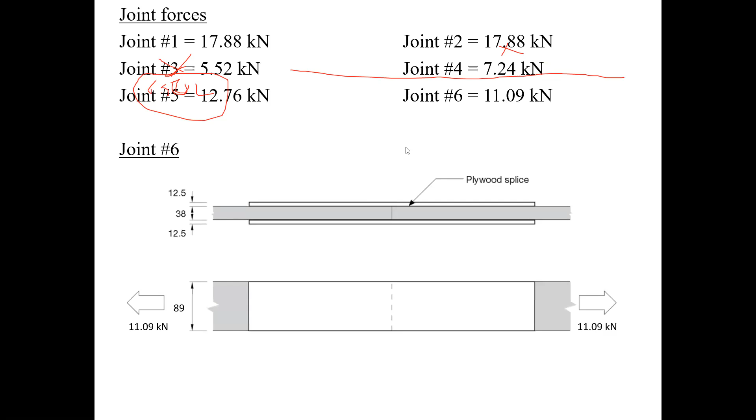So now we know that NR has to be greater than TF. What was our TF value? Did I make a mistake here also, or shall we go back and check? What was the TF value we had? 11.09, looking at joint 6. Okay, so that's 11.09, that was our TF value. So at least I did that correct.

Now remember, guys, change this to 0.502. Would somebody please recalculate this for me? It's 22 nails. Thank you. Is it exactly 22, or is it 21 point something? It's 22.1. So therefore you should be using 23 nails, guys. Okay.

Okay, keep that in mind. Okay, 22.1. You always want to make sure the resistance is more than what you need to resist the force. So 22.1, as far as I'm concerned, put 23. And like I told you, okay, so we're going to use 23 nails.

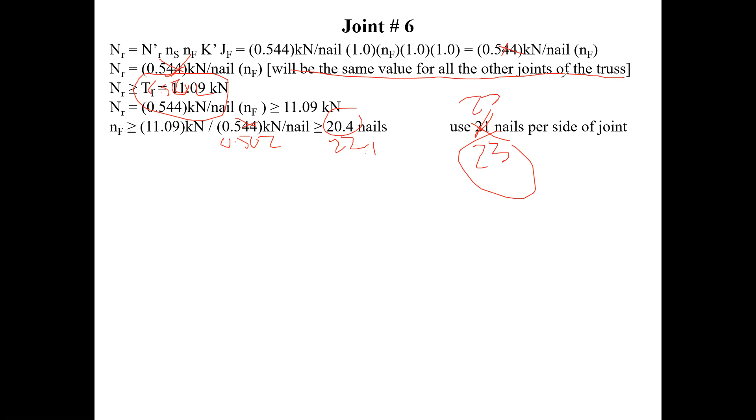Okay, now I'm going to show you how I tend to do it. Okay, so these are the values I got from figure 7.4. We've seen these before, right? Now, this is what I'm going to show you, okay? Determine the number of rows. In other words, how many rows of nails can I put? Can I put only 2 or can I put 3, okay?

So basically what I do is, a 2x4 is 89 millimeters wide, right? Now, if I look at a 2x4 here like this, okay, I know I have here 89 millimeters wide. I know according to the minimum distance of the edge is 13. So I need to have at least 13 millimeters here, and I need to have at least 13 millimeters there. So I need to have at least that, okay?

And then as far as the distance perpendicular to the grain, I need to have at least 26. So in other words, if I decide to put a nail in here, the distance between here and here, perpendicular to the grain, has to be at least 26. So this is what I do. I say 2 times C plus 2 times D gives me 67, right? And I have 89, therefore I know I can put 3 rows there.

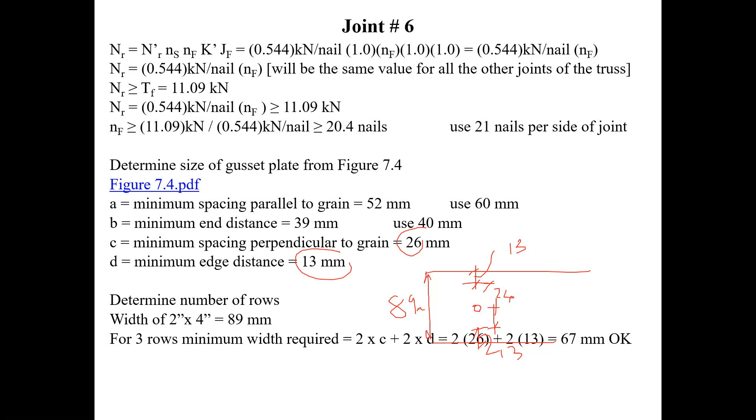Now, so this is what I do. Once I have established the number of rows, okay, so this is the nail on the near side. This is how you represent the nail on the far side. In other words, this would be nailed from the other side. The head would be on the other side and the point would be on this side. So this is how I represent a nail on the near side, the one that you're seeing, and this is the nail on the far side. That's just graphically, so the carpenter knows he'll alternate which side he puts the nails.

Now, here is my joint right here. Whatever I do on this side is going to be symmetric. So here I need 13; I will put 15 millimeters edge distance to give me 2 millimeters of margin, and I'll put 15 here. And then I'll tell the carpenter, put it right down the middle. I don't even care, because I did this calculation and I know that I need at least 26 and I got more than 26. If I do 89 minus 15 times 2, divided by 2, that leaves me 29.5 millimeters here, and I need 26, so I'm okay. So all I'm going to tell the carpenter is make it equal, okay?

And therefore, now I start with an end. I need 39 for an end distance. I start at 40, and I know that I need at least 52 millimeters parallel to the grain between these nails. And if I maintain that minimum 52, I'm allowed to put an alternate nail in between, okay? So therefore, I will go to 60. Now, I'm sure that this is wrong because I probably, okay.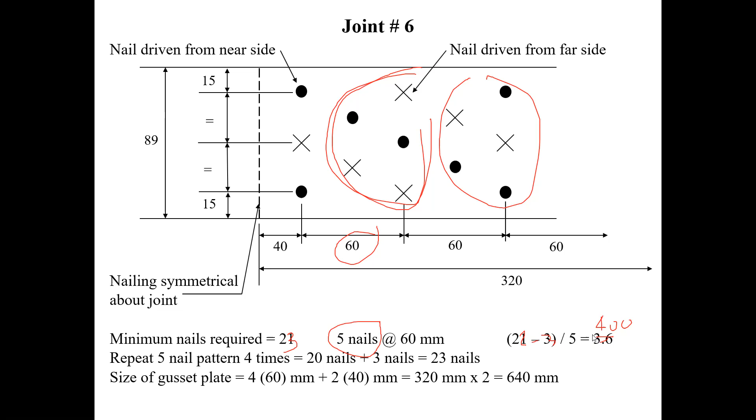So like I said, the 3 rows are gonna work for each member, even the 2x6, because the 2x6, you can probably even put more, but it's up to you. And then after that, if you remember, you put an end distance here, and you remember that if you keep this minimum perpendicular and parallel distance here between the nails, you can add, and therefore you go ahead and you do the calculations. So you see, I made a mistake, but it still works out that I have a total of 23 nails, and therefore that's it. So that's the last of the design you have to do.

In other words, let's go back just so that we're all on the same page here, okay? So what did we say that our NR value was? Did somebody write it down, please? 0.502 kilonewtons per nail. Is that what we said it was? Yes. Okay, so if we go back here very quickly, here. So if I take this joint here and I divide by 0.502, how many nails do I need for this joint? 36. And therefore I need 36 for that joint, okay? And then all I have to do is work out the pattern and make sure I have the right length, you understand? So 0.502, that tells me how many nails I need.

And then all you have to do is take that 0.502 now, because that stays a constant, because all your joints are gonna be made with the same lumber, the same side plate, and you've calculated the NR value for all those joints to be exactly the same. So therefore this would be divided by 0.502, and that tells you the number of nails you need for this joint, we just did this one, and you would do it for this one here. And do you want at the end the total number of nails that we have?

No, what I want to see in your calculation sheet is what you saw here today in the lab for the first one. Then you tell me NR value is the same for all, and then you say for joint number 1 and joint number 2, number of nails required, 17.88 divided by 0.502 for joint number 3, and you show me how many nails you have, and then you're gonna have to work out for each joint the length of the gusset plates. So I don't have to add them up like a total number of nails? No, this is just for your calculations, and then after that, based on the number of nails, you'll be able to calculate the length of the gusset plate.

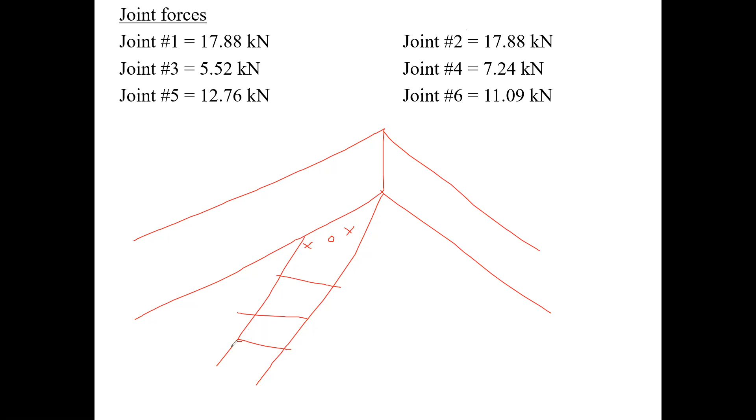And then after that, your gusset plate is going to look like this. It's going to go across here like this. And you're going to have your other member in here like this. And your gusset plate is going to go up here like this and like that. And therefore you're going to have to determine this length here and that length there.

When it gets to these very geometric shapes, what I do to calculate my gusset plates: I decide where my first row of nails are, and then in AutoCAD I simply offset, offset, offset, and I let AutoCAD do the calculations for me. Isn't that easy? So use the tools, guys, that you have to simplify your life. It makes life much easier.

So with AutoCAD, you can very easily calculate this size of gusset plate, because once you've established where you're going to be putting these with those requirements, and you know what you need, you just offset with AutoCAD and you'll be able to determine that one. So that's the one at the very top.

And the ones that people have trouble with, for example, the web member here that goes like this, and here's your top chord. Basically, you just have to calculate the number of nails you need here. Once you've calculated that, you can flare this out a bit to make sure you have enough room. Then you put the same number of nails here, and that's going to be that one there.

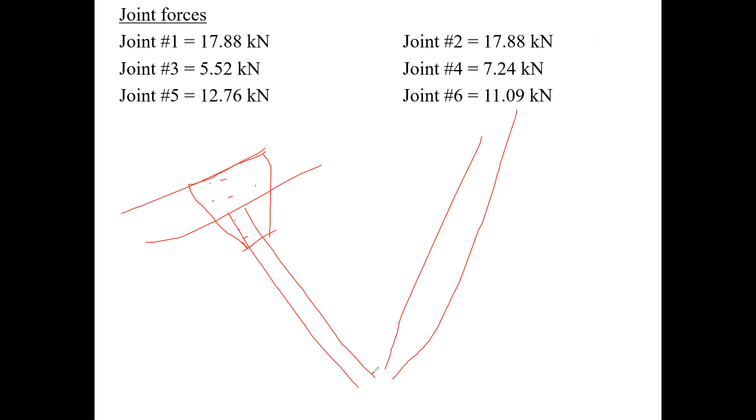And then where the two of them meet here at the bottom, your gusset plate is going to be having nails there, and therefore you're going to have ample room. All that's really going to be required is to determine this length here and this height here, and that's it. And then your design for your project is 100% complete. Isn't that nice?

See? Very nice. And now you guys are going to be able to design your own country place for your parents or for yourselves, and enjoy your living space, as long as it's one story, right? Okay, so we can't double it up. Yeah, you can do 2 stories, but you just have to remember the load path and know how the loads are being transferred, because the only thing that changes is the vertical members get more loads as you go down, right?

Well, are there any questions? Last week you were mentioning some Excel spreadsheet that you wanted to show us, but we didn't have time. Yeah, well, I'm glad you reminded me. Do we have time now, or we can do the next slide? We have time, we have 10 minutes. 10 minutes. Wow. 9 minutes. Like 45 minutes until 6.

I know, but usually, if we were in class physically, instead of taking a 15-minute break and then giving you a 15-minute break at the end of the class, I usually go straight through and give you a half hour, and we all call it a day. That's how I've always managed it in class, and everybody was in agreement with that. Makes it much easier. So anyways, I'm glad you reminded me.

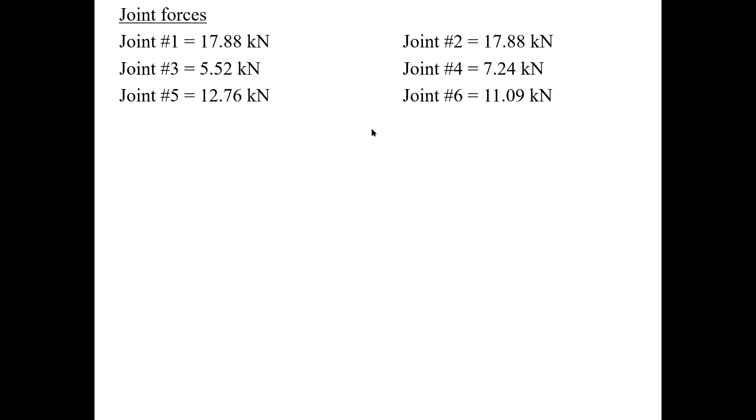Let me do that right now. As a matter of fact, I'm going to send you the spreadsheet. I'm glad you reminded me about this. Let me go and find the spreadsheet.

Okay, so here's a spreadsheet. And I just want to talk about this spreadsheet, okay? And unfortunately, I don't think that I'll be able to compare the answers, but okay. Okay, hold on a second. I want to share screen, but this is in the way here.

Do any of you have the built-up column tables with all the values for the built-up columns? Like the 2x4s and 2x, you understand? Does anybody have that table available? Because I can't. I should have brought it up. The table for the built-up columns, whether you want to use a 2x4, 3-ply, 2-ply, or 2x6, 4-ply, 3-ply, for the exterior walls.

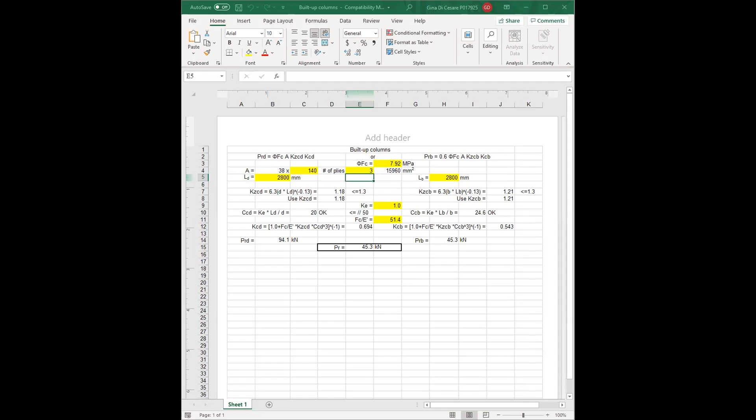Do you have that? If we have it open, yeah. Do you have that table with you? Because I just want to show you. Okay. Because I don't have it, and I should have called it up. Okay, so this is what I prepared for you guys. Now, what I want you to keep in mind. Oh, first of all, let me close. End show. And I apologize for that mistake in the lab, guys.

Do you guys see the Excel spreadsheet? Yeah. Okay. So what I did here, very quickly, does anybody have the table? 1 second. Yeah, I have it, sir. Okay, you have it. So right now, let's say you're designing the built-up columns. Let me just annotate. Now, what you guys didn't realize, and what I should have highlighted, and I'm going to highlight it now.

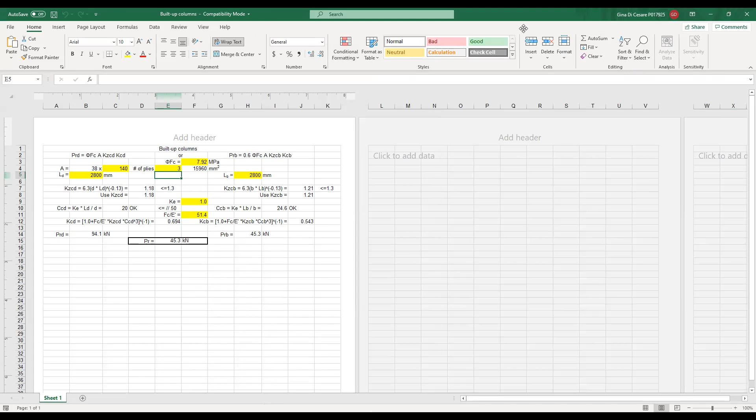Right now, all the values in that table are based on the built-up column that you put in your wall here not being laterally supported in either direction. Do you understand what I'm saying? In other words, you're standing up this column like this. And therefore, this column can either fail with respect to the B or with respect to D. Everybody understands that? But in reality, when you're building an exterior wall, what you're actually doing,

in reality, you're going to have sheathing on the outside of your wall. Do you agree? You're going to have gypsum on the inside of your wall. Now, even if you just have it on one side, it doesn't matter. And if you are going to be nailing your plywood to your B here, what happens to the B axis? It gets laterally supported. So the table that you have right now, it's as if B is not supported at all. So let me give you an example.

So Adriano, you have the table, right? What I did here for you guys, I'm going to send you this. So for example, if I decide to use 2x4s, 38 by 89, and I have a 4-ply column, and the length is not supported in either direction. In the table, Adriano, for a 4-ply 38 by 89, do you have a length of 2,800 millimeters? Yeah, we have 2,800. The PR value should be 43.1. 43.2. Okay, so it's just the rounding.

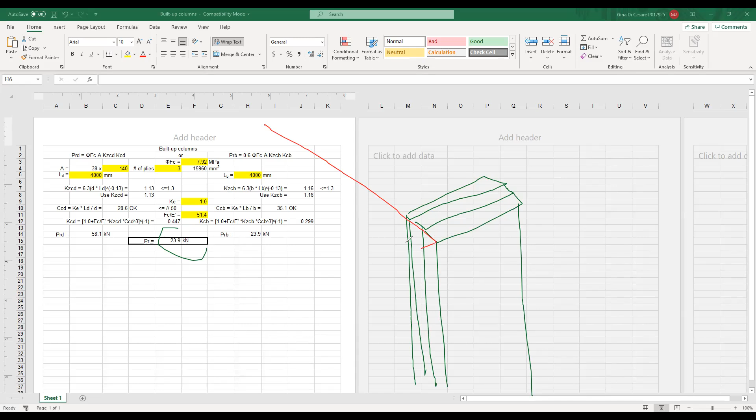you know that in your exterior wall you are going to put sheeting here. Does everybody understand what I'm saying? You're going to be putting plywood, right? And when I'm putting that plywood, and if I nail that plywood at every 300 millimeters, what am I doing to the B of the column? It's laterally supported. I'm bringing the LB down to 300. LB is no longer 4 meters long, it's only 300 millimeters.

You guys understand that? In other words, if this is my plywood here and my column is behind it, and I decide to nail the plywood at every 300 millimeters, I'm laterally supporting the B dimension of my column. Do you see that? We see it, sir. Okay.

So therefore, when you want to calculate the PR value, if you use the tables, it's as if you're not taking advantage that you have sheeting here. You're just assuming that it's not supported either in the B or in the D. And the tables give you the value of the weaker axis. But now if I come to my table here and change this to 300, look what happens to the PR value. It goes up, and it makes sense because now B is laterally supported.

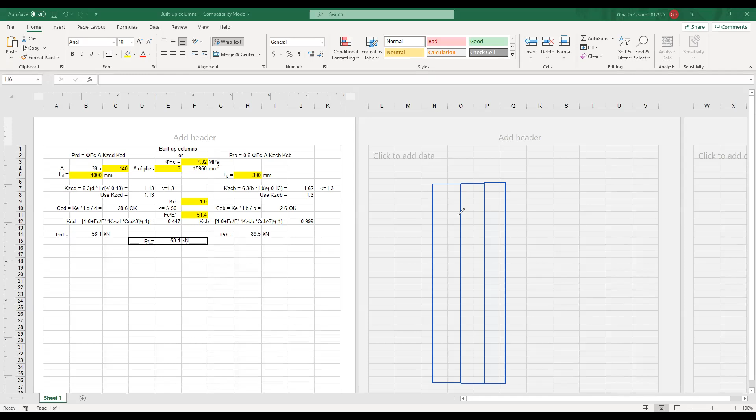If you nail each ply at 300, you can actually go to the stud table. You know, the book where we have the studs. And you can take the PR value of one stud and multiply it by 3, if you go through the trouble of doing it, but it's not worth the nailing, you understand?

Now, just to give you another appreciation: when I have a built-up column, it's usually done around windows. We all agree, right? Well, when you make windows, you have framing here that creates a sill around your window. So this piece of wood also gives you lateral support. But what's really going to give you a lot of the lateral support is the sheeting, you understand?

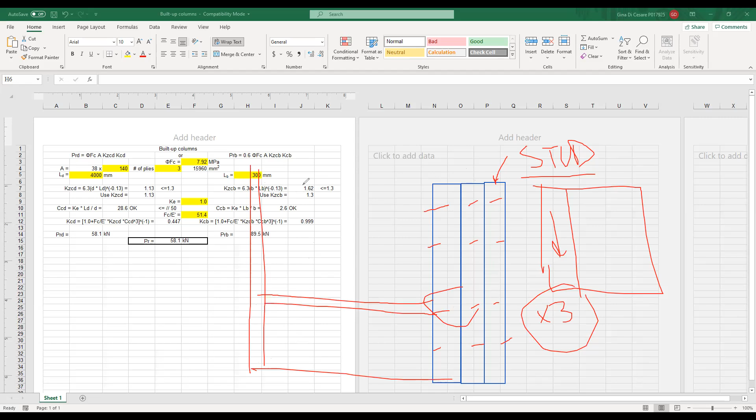Now, keep in mind that if you have an opening here and an opening there, you don't have very much lateral support in here. So therefore you would put this as your LB value for your column.

The only time that you'd be able to go down to 300 is if you can put nails all the way down across the column. But for example, if I happen to have my column here, here's my lintel, and then I was able to frame up to here, and this is all sheeting here, this is all sheeting here. Well, this becomes my LB value.

In other words, this is the part of LB which becomes unsupported. And then I would put that there, and I would let my spreadsheet calculate the PR value. And it'd still be better than just going straight to the table and taking an LB going the full height of your wall. Okay, so I will send you this spreadsheet. I'm gonna write it down, send spreadsheet.

And guys, as a matter of fact, when I did the spreadsheet, first of all, I did a couple of manual calculations, okay? And then once I finished my spreadsheet, I took a couple of values in the table and I checked them, and I noticed that either we had exactly the same value, or I had, for example, 1.1 kilonewton more, or they had 1.1 kilonewton more.

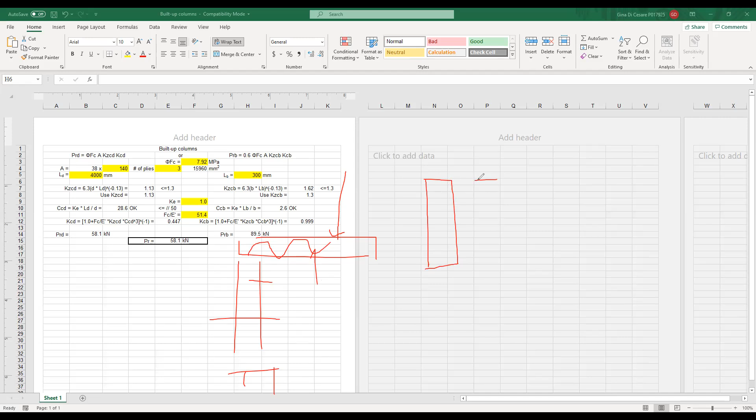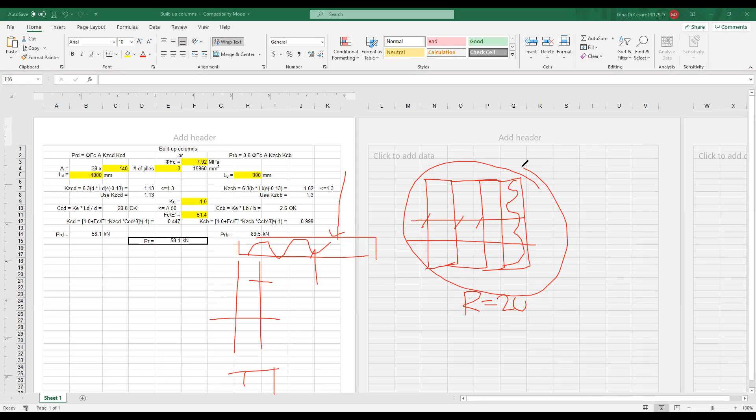Okay, so for example, if all of a sudden, like 3 pieces of 2x10 to make your lintel, if the thermal resistance here and the little bit of insulation that he can put here on the inside doesn't get him whatever it is, I don't know what it is because I'm not an architect, and I never go and prance around in the field of an architect, but let's say in imperial, I don't even know what it is in metric, this happens to be R20, well, the architect would have to break his head on how to make this be an R20.

So he wouldn't tell us, like, let's say this is not sufficient, we need more room. The architect would do it himself. Well, no, then you would work jointly with the architect, Alex. Understand? Got it. In other words, it's a team effort. You know what I mean? Got it.

What I'm getting at is that if, for example, here's my truss sitting on top of my lintel, you understand? And I calculate my loads. I need 3 2x10s to support that load. That's all I care about from my point of view. You understand? Yeah. Now, after that, if he says, yeah, but I need to create an R value, we'll work out a solution. You understand? Okay, got it.

So if, for example, this lumber doesn't work and he needs to create something, Alex, I can tell you that in that case I might decide to build up what we call a box beam with plywood, you understand? Build up a box beam with plywood, calculate, and then fill this in with insulation and see if that works for him. I would try to find him alternatives, but that's not my concern.

You understand? And then if all of a sudden he says, well, I need to have so much insulation, well, put it here and create a bulkhead. So it's nice to work out solutions with the architects if you can. These guys will give you alternatives, and then all you have to do is calculate to see if it works. Okay, sounds good. I know what you're saying. So that insulation in between is nothing for you and I, for us in engineering.